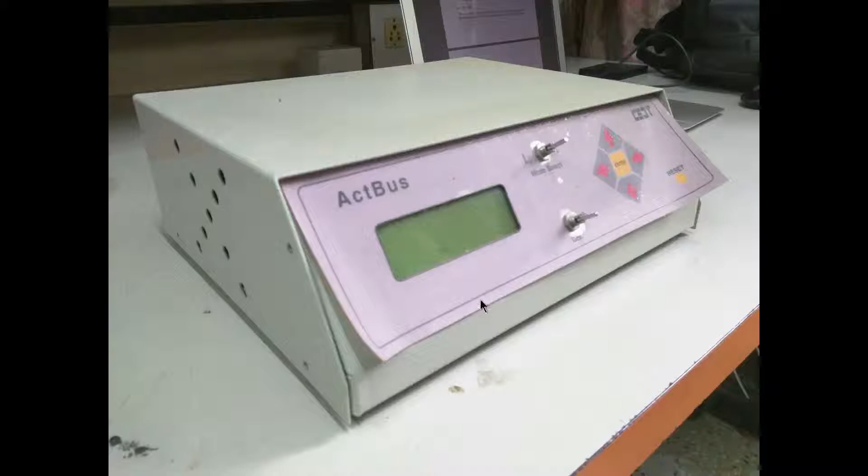Earlier, the only way we could do all this was to try to make it in sheet metal. Please have a look at this model in my hand. This is typically a good starting point. What we used to do was try to make this out of cardboard. Cardboard simulation was the simplest way of making it. I have already shown you, but to make this lecture complete and independent, I will also show you how this was developed.

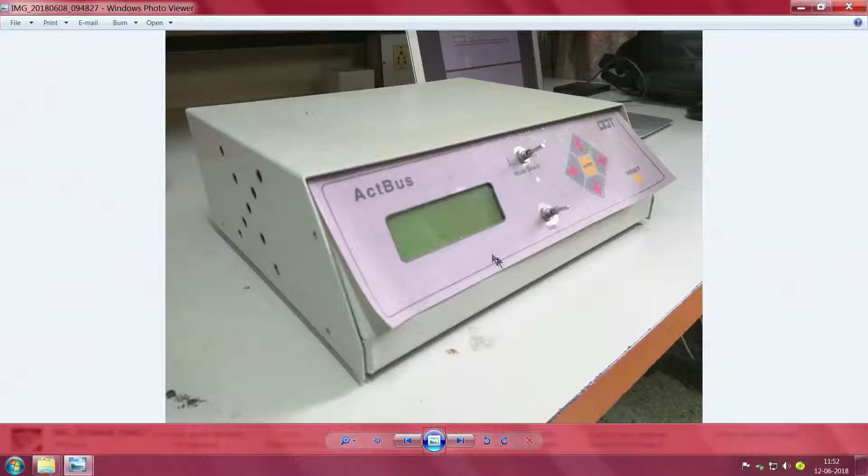This is something generic, so do not be carried away wondering what is the function of this, what is that function. While I can probably talk to you about the function, that is not the topic here. If you were to make items like this, earliest was you try to make it on your own, if you have a workshop, alternatively go around searching for it. Now here comes the important thing about detailing.

On the front we have all this beautifully colored design, you have seen that there are 4 keys, and traditionally what people used to do is make it into a simple matrix-like thing. If you can kindly look at this keyboard which I have here, this computer keyboard, you can see these 4 keys. Because of various considerations, you have no choice but to place them like this, because there is no way of making them into a diamond shape.

If you see this side, however, there is a provision by which this is the home key, and this is up, this is down, and this is towards the left, and this is towards the right key.

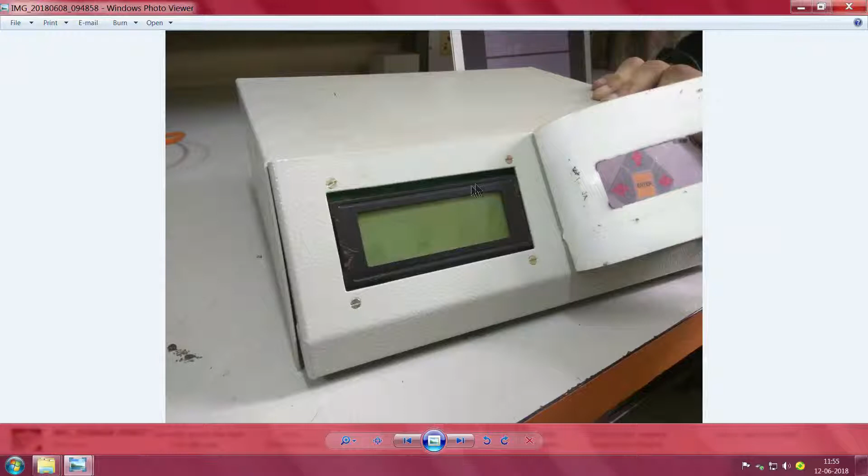Now you see one very sad thing which often people do. You see here, this is a key, I am not sure whether it is a potentiometer or anything, and unfortunately the letters or the designation for it has been printed underneath, very tough for anybody to read. Similarly, if we were to place it here, we still have this problem of how close do we place it. However, for this reset button, there was no issue, they could manage it.

Luckily it is there, you have seen that after everything has been done, somebody by hand has put left and right.

So these sort of surprises can easily be got over if you do the whole thing in simple rapid prototyping using 3D printing. The advantage of this is, something I don't know, they have written some DBL and so on, maybe you can put it there and then you can make these things easier.

Now when you come to the back of the equipment, things have become much more serious. You have seen this - we have a potentiometer, some jacks, and imagine after the wire has been placed here, you just can't read it, even as it is we can't read anything. These surprises can easily be got over if we make it up front. The whole thing could have been printed easily and would be very easy for us to do.

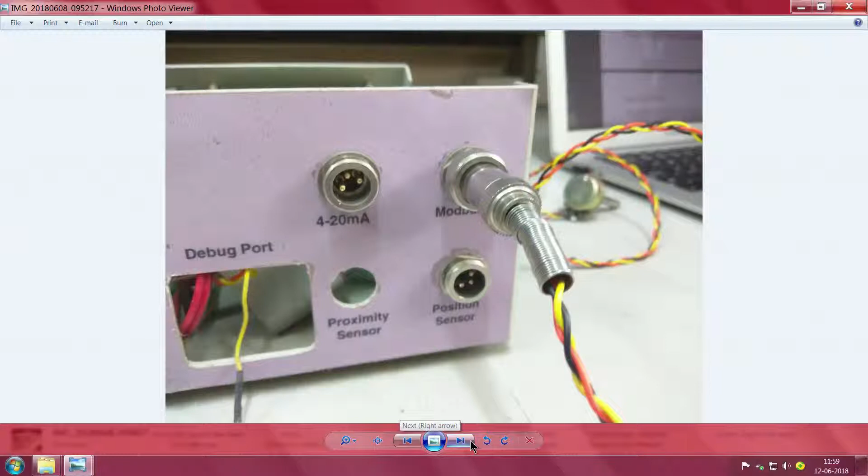See here, what I was talking to you a little while back - the moment you put all this, there is no way of reading anything here. Go further up, it's a complete jungle there. Anyway, my topic is not about this layout, the topic is how to make a nice box for it.

A slightly improved version is that you see here, instead of those connectors, this unit instead has these banana sockets including wraparound. You can open it, put it open. In the case of a professional unit, we have terminations which have screws and which are also protected, and this is in the lab environment. And you see here we have something neatly put there.

Why this has all been done, and why I am insisting for you, is that being in any sort of developmental lab, probably these are all generic. Once you make solid models for this, it is easy for you - just like you go to the workshop and use a standard punch and die to make these openings or standard drill bits, you can easily transfer all these details across all your projects. So first, when you start the project, you probably have to spend a lot of time getting the original component, and then try to create these things.

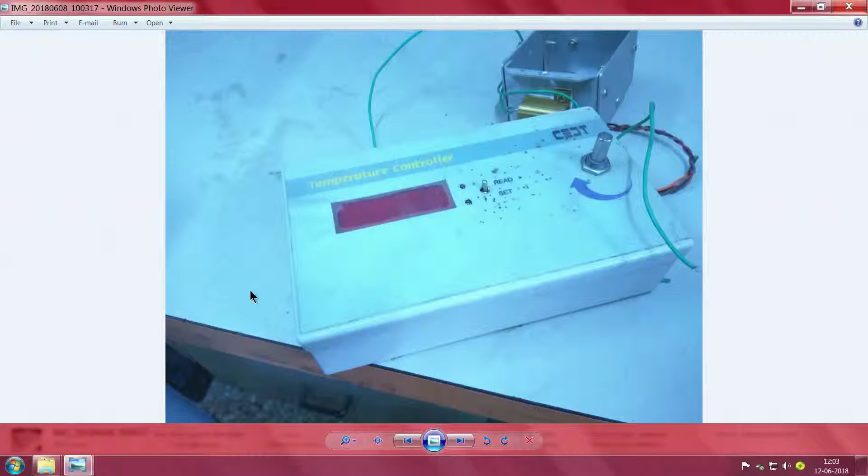It is very much possible for you, if you use our RPT techniques, maybe this display and all this stuff can lie on the long side, so you can stack them. Right now this can't be stacked, this can only be used for one unit. We can stack them. Alternatively, in the case of drives and all that, probably you can stack them like this here, so you can have a matrix of these things for various demonstrations.

So we have come back, I will just quit this. Now try to show you something else. Here we have, I do not know, it is a generic panel which needs to stay at a readable angle. So if you go to the left side here, you see probably this is the profile.

Advantages of working in our scheme is you can now conveniently build all these things. There does seem to be a little error here, is it not? But this is, I am trying to justify, probably intentionally provided. Idea being, you have rubber shoes or rubber feet here, and this will come all the way down. This is almost touching the place.

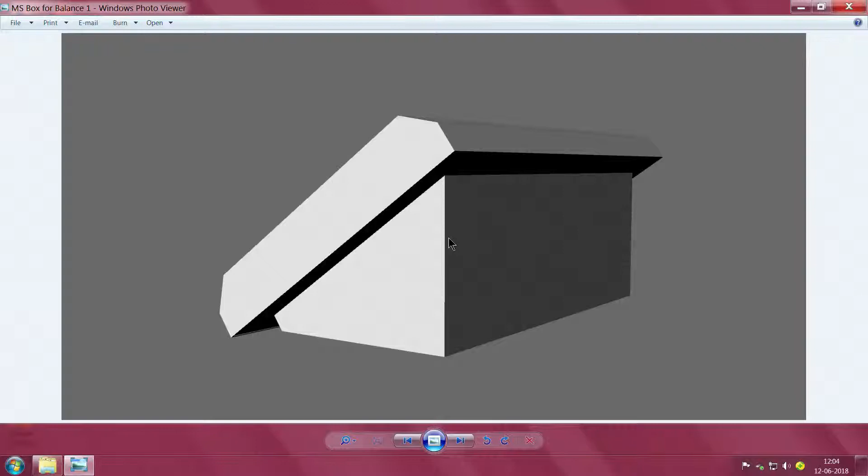So you see here all these profiles, one of the first things you will notice is they are flat. So if you build it in, what I call, a 3D printing, probably if you can split the parts properly. If you see here, this is vertical, this is vertical. So it is possible for me to build this whole bottom cover in a way it builds easily, or alternately I can make it in a flat condition.

And the most important thing is, you have seen this has been shown here like this. In the case of our prototyping, probably we can even just take it straight like this. After we take it straight, think about how to assemble these things. This is where we have a nice advantage of working with these things. See here, so it is very easy for us.

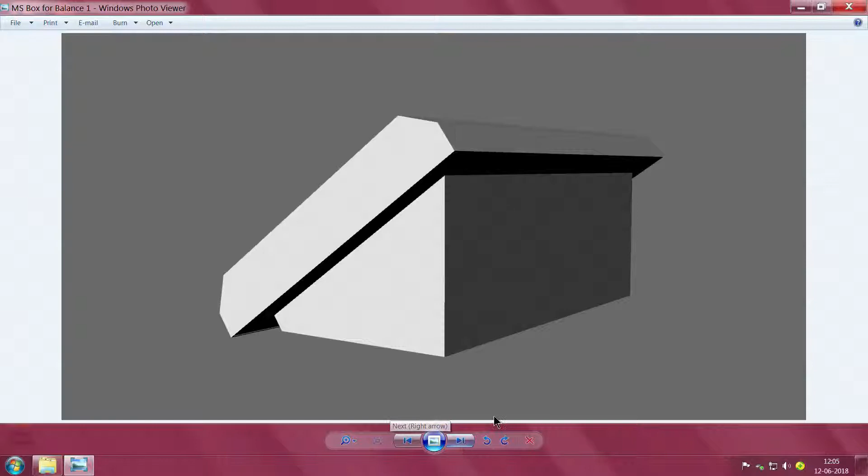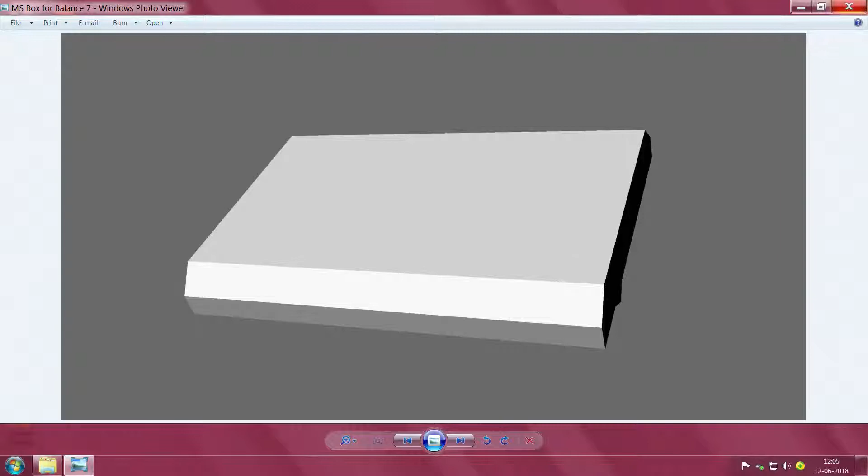So the first thing is, you need to conceptualize your equipment, and if you have all the detailing, it is easy for you to go ahead and do your whole bill of material.

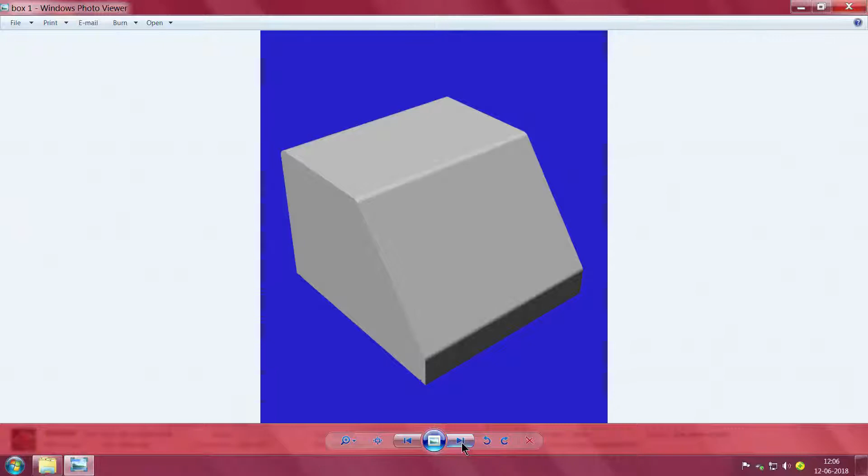Coming back again, this is typically an acrylic module, which is used for, I do not know, generically it can be used for anything, but things are written here, you can read it. And here comes the advantage, saying now this is exactly what the box is trying to show here. Have a look at it.

Maybe it is a time that you can have a look at it. This is eventually the outside thing we would like to have. Can you see here? In the case of traditional sheet metal, we always split the whole thing into two parts like this. This is made as just an exercise so that participants can understand.

In this particular case, this can be used both by sheet metal work, then it can be used directly for 3D printing, or it can be used for just directly laser cutting all these parts, like this, and all can be laser cut. Or if you want to be a little more careful, especially with these bends, maybe we can laser cut the whole thing, and then after that, by appropriately using some bending technique...

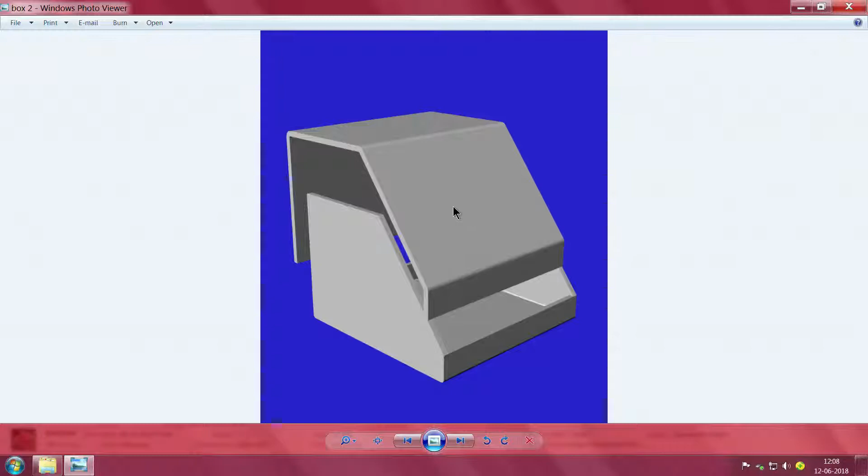In our case probably it is made with either polypropylene or appropriate plastic which bends over easily, or as shown in one of the earlier lectures, polycarbonate sheets of the correct thickness, if you bend over nicely this whole thing can be fabricated. Can you see here, slowly, if you see there is a radius internally. If you make it by sheet metal, easily this can be done, but if you make it in any other way, a little bit of care has to be taken at these corners.

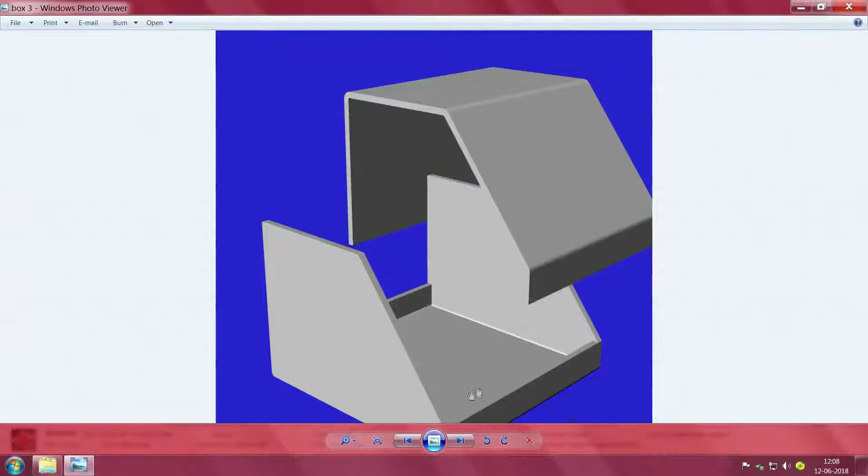For convenience, the corners have been shown continuous here, same thing here, there's no gap or anything. But in real life, because of spring back, or even in the case of plastic, it's impossible to do it. However, if you were to make these things judiciously, cut them using laser, you can always assemble it back with a proper adhesive.

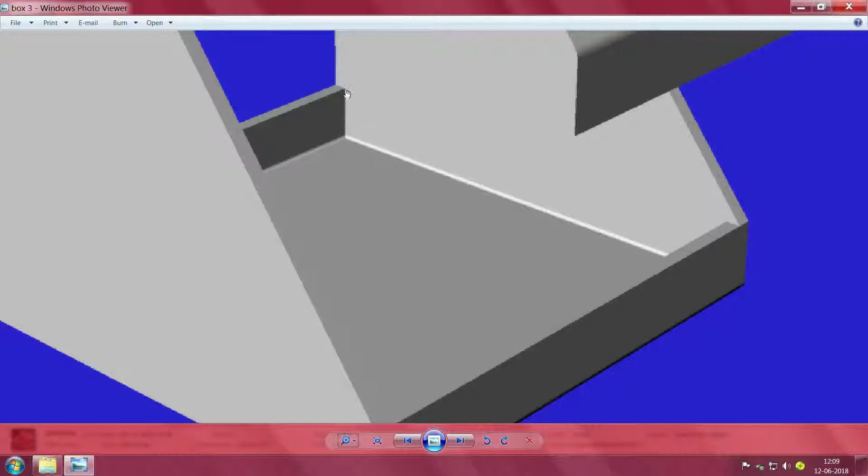In the case of styrene based products, most of them work with chloroform. Alternatively, you can use super glue, cyanoacrylate glue. Except for the toxicity and various things, it's very much possible for you to make these openings and change the color about it.

We can easily print a device which looks a little like this. Now coming back to my display here, you'll notice these two things have intentionally been left kept upside down. Depending on how you do it, if you remember carefully, we have no other choice but to build it like this. If you build it like this, the advantage is it builds neatly here. However, if you attempt to build it like this, we end up with a lot of support material.

So if you have to make it lie on one of its sides, all these planes become vertical, and in one shot we can build it. The advantage being, in case you want openings here, or want to add things here, or have openings elsewhere, everything can easily be built into the original product.

That is where rapid prototyping helps. So the first time, probably you need to make openings, take it out, make it out of cardboard and all that. Eventually multiple prints you can take easily, using the same file that you have created.

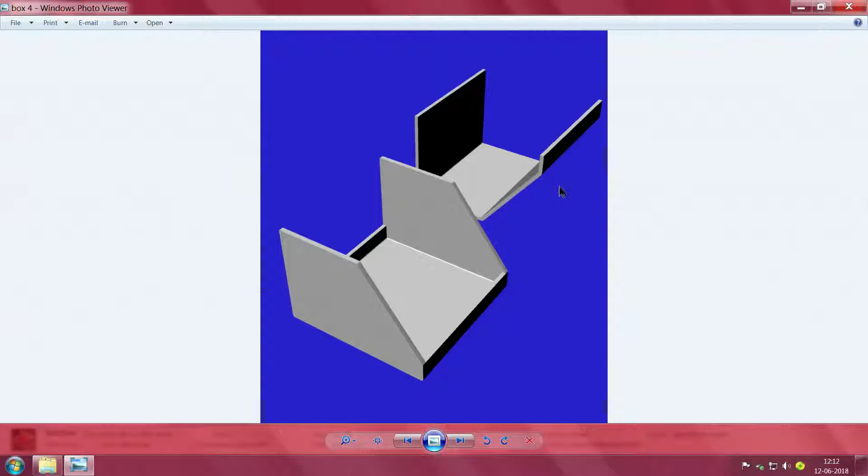In case you have created a DXF, IGS, DWG, or so many of these Dassault, Autodesk, or Siemens format drawings, they will be accepted by most fabricators. And in fact, if you send out the file along with your check in the mail, please find enclosed check, most likely within 1 or 2 days you can have these parts delivered.

Just for clarification, I was showing how these things work. That thing was intentionally built with a thickness, here we have disregarded the thickness when first trying to make these things. So this is more a concept model, similar to the one I showed you, which has thicknesses. Here this is a concept model; you can try it in a flat sheet or cardboard. After you're happy, if you add the thicknesses, the full model can be shown. This is without thickness, this is with thickness, but without the corresponding radii and all those things.

So we shall come to the important point that this 3D printing, contrary to popular expectations, it's not just that it will print. You need to understand a little, but fortunately hackers like you and me are out there available, and maybe you can download something and modify it, and if it's open source you can play around conveniently with it. Now same thing, you see here, this has been cut into small segments.

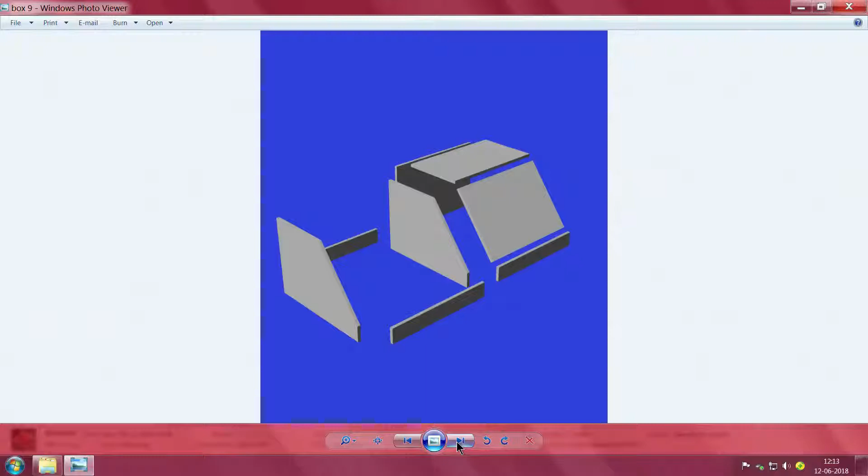Now after cutting it, several options are there. I told you one of them is you can probably cut it in cardboard and try it yourself. That was the development model which you have made, or the same thing you can use for laser cutting. In the case of laser cutting, depending on the thing, you can do multiple models here.

Now just as a thing, let us say I have 4 openings for the thing here, and for connectors I can have openings similarly on the side. And if you see, this is the inclined front surface which matches here. So here I can have all the openings meant for various controls, displays, any other units here directly.

And as I was telling you earlier, you can probably use it, you can save a lot of material if you print it flat. Since here there are no openings and there's a small thing, making it, building it in this condition is desirable, because no further processing is required.

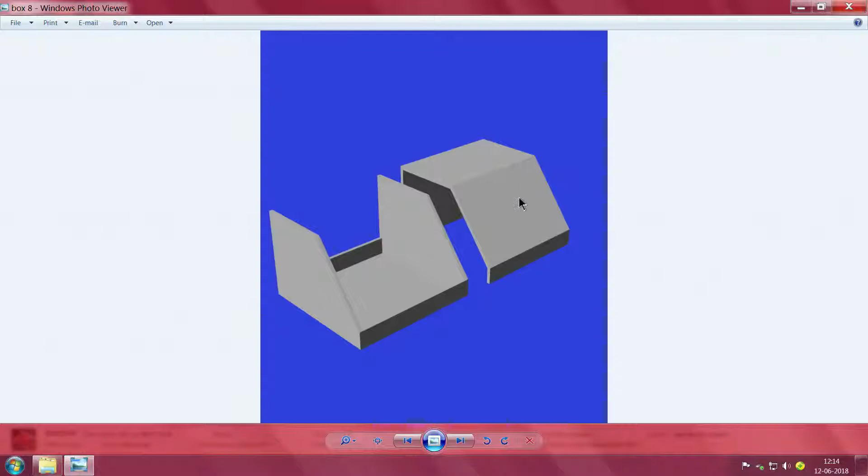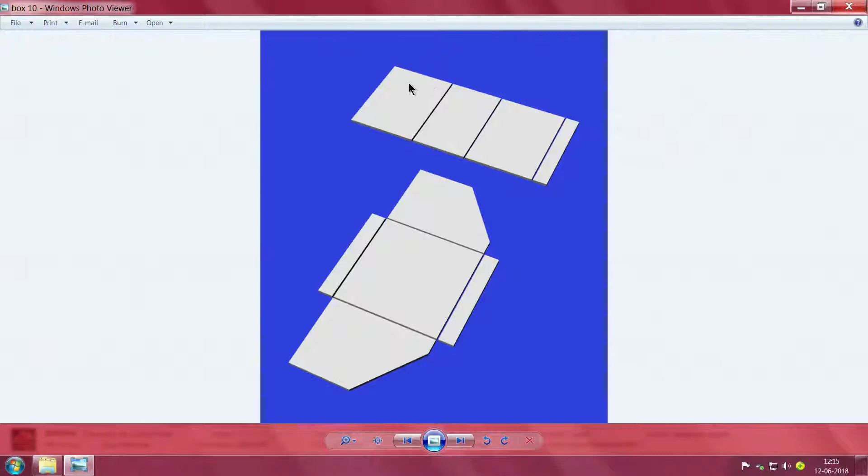However, when it comes to this inclined surface, we are likely to end up with a lot of support material lost, and whichever way you orient it, you may end up with it. But in this case I told you, you can put it on one of these edges, but even then this material inside requires a little post processing. After printing, you have to knock it out and then sand it a little, and anyway this requires all the post processing.

So I will come to another convenient way of building full-fledged sealed boxes. If you see here, this is actually a model that has been created some time back. Looks fine, absolutely no problem, isn't it, except that to save material and have all these things, somebody has worked a lot of detail.

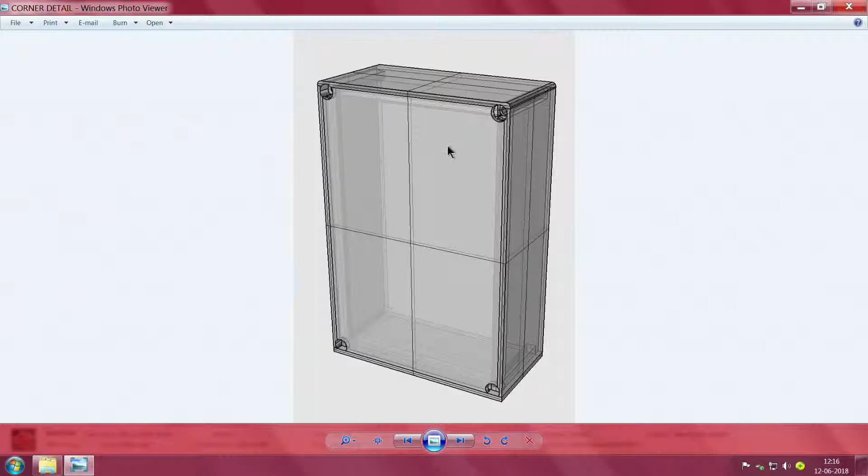This front stuff has been made with transparent material. Right now it is very much possible to print transparent material, and if you do not want the contents to be visible, you can always put a decal or a sticker on top of it. These proportions for an initial thing you can get from the internet from various suppliers. And the magic is, sadly, like most things, you will never have a perfect fit or anything.

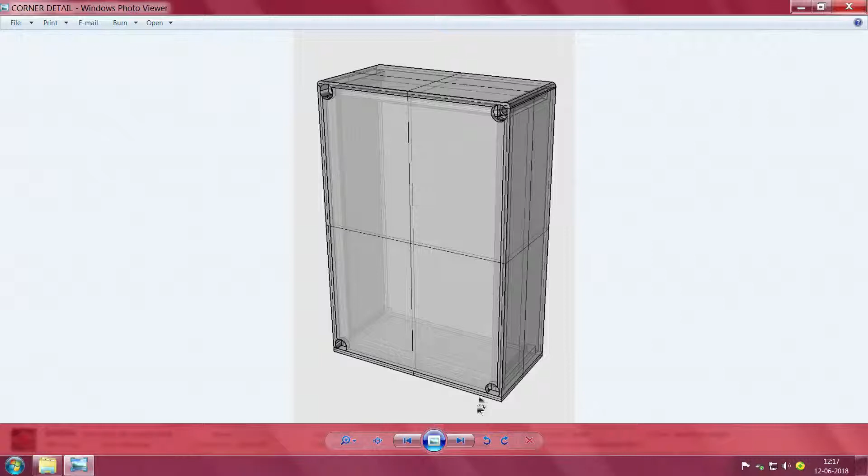There is no one size which fits all, whether it is shoes or clothes or various other things. So you may end up with an enclosure which is not deep enough or too deep, not shallow enough for you, and all the other dimensions, you will end up with something which is tighter or something with unnecessarily extra area. Those times, if you have to ask the manufacturer, that is going to be a big nuisance. So what has been done here is, let me go back a little and see.

Say this is the final box seen here, and you will notice that there is no split line saying where do you close it. And in the case of actual injection molding, probably all these radii are important, and further you cannot afford to have sudden change in cross sections.

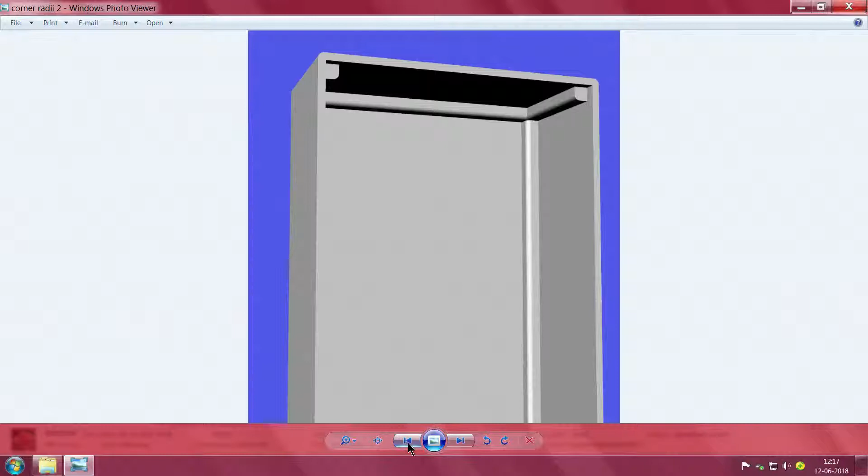But you need this corner strengthening. When you attempt 3D printing, it is relatively easy for us. In fact, if you make these like this and then print them with this base down and print it up like that, these things come out very well.

Now comes the other thing, if I told you, can we add a threaded insert? Depending on how serious it is, if you can have a through opening, it is very much possible to put a threaded insert. One side you can put there, one side you can put here, and enough clamping force can be given such that the cover can sit properly, and the cover itself can be made in opaque material or it can be made transparent.

In this specific case, if you make too many openings, chances are things will leak. Instead, you can make it with a transparent cover, because it looks like various clear materials will be there. I think in the third or fourth lecture I gave you an idea of what materials can be used, and you can print it with a clear cover.

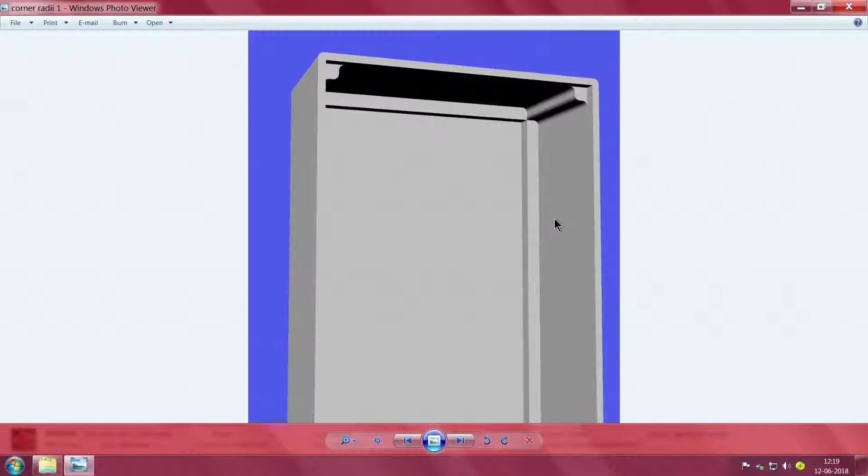You can always put a fascia. If you put it inside, it looks clean. If you put it outside, you have some advantages, and expose only the same areas as you have done in that sheet metal exercise which I have shown you. So you see here now, at the back we have this, or in the front.

Let me go forward for something, how to make use of the same thing in the case of, let us say, you need to make a small cup. This cup is required for you to hold maybe some torch cells or maybe a sensor or anything. So if the manufacturer has not given you a recommended enclosure, creating such things and printing them is extremely easy, you understand.

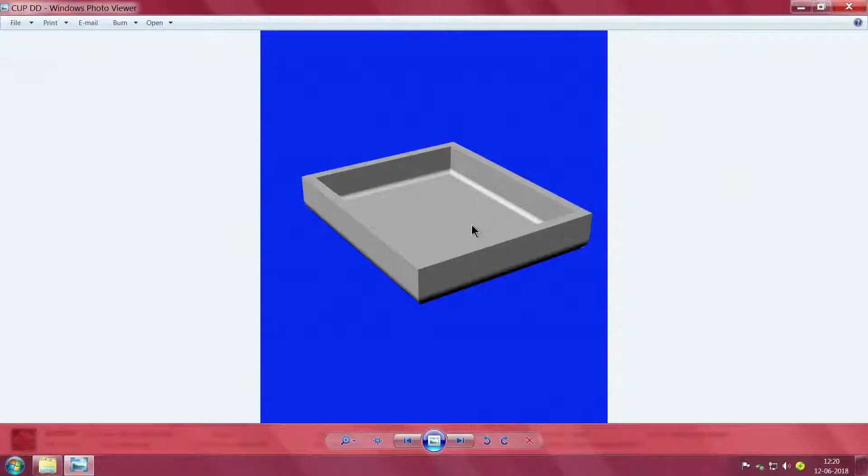So you must make a model of the contents. It could be a simple printed wiring board which has all the various displays and sensors, and then after that, printing this is extremely easy, and up to maybe a few hundred models, easiest is to carry it like this.

Small difference here, if it involves strength, we end up having to give all these corner reliefs because bending is involved. So since the advent of printing, all the small things earlier which we used to unnecessarily concentrate on how to make these things, which is probably just of the early industrialization, everything was made out of tin cans.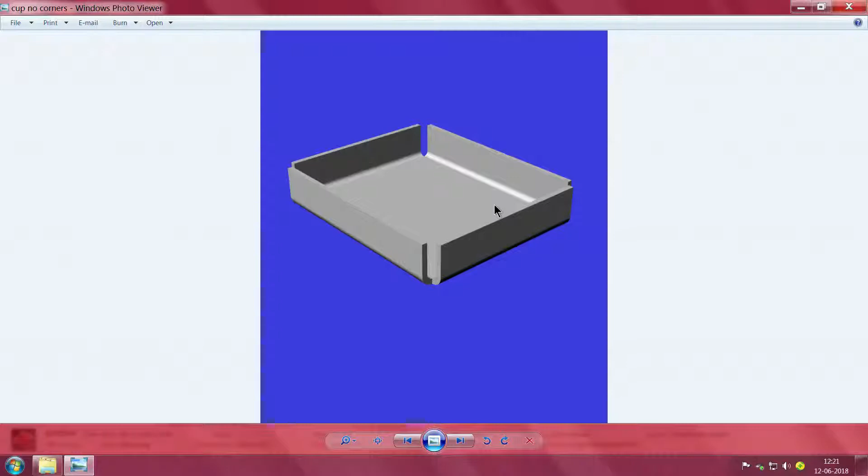I have shown you a box of mints, that blue colored box earlier. It is made with a 0.4 millimeter galvanized mild steel sheet, formed like this, including a lip. Now all this can very quickly, without too much trouble, either be made like this or you can happily print the object directly here, which I think is really something.

So now you have seen this with the reinforced corners. Now, what has been done is, let's say you need to make it using sheets that are cut directly in a laser cutter. In the case of laser cutter, unfortunately, unlike 3D printing, you need to reinforce the corner separately with these items.

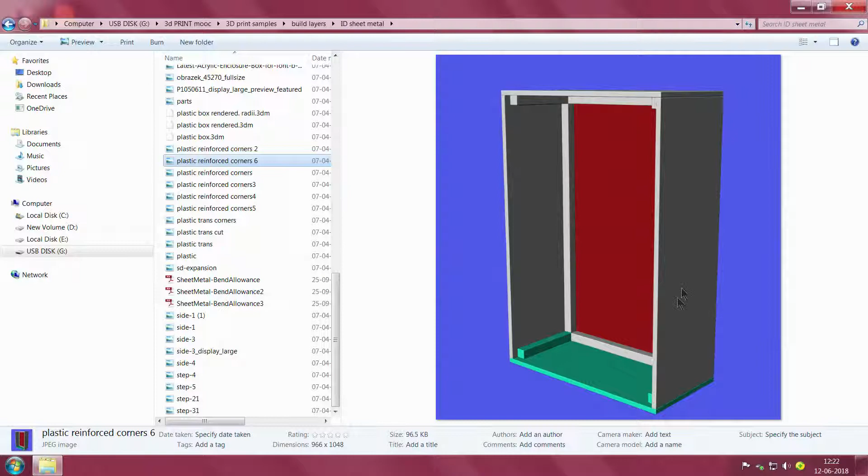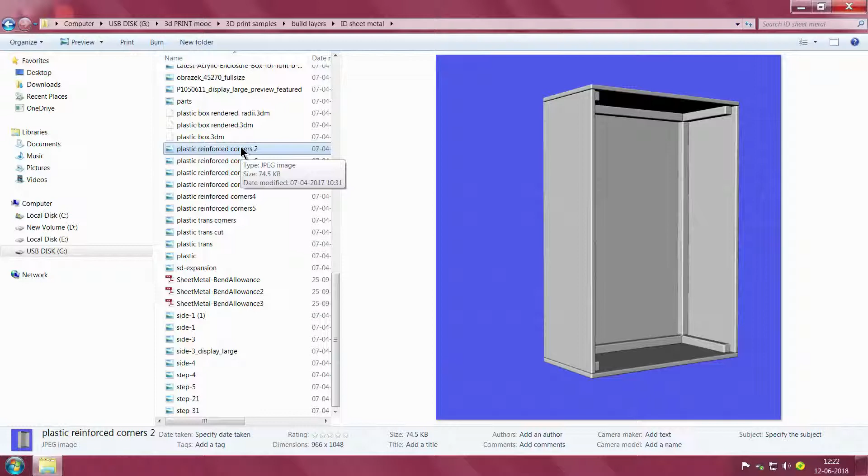So this has been done just to show, maybe start here. You see here, this is our original drawing, 120 by 80 by, I think this must have been around 35 or 40 millimeters, and the small things, we can attach them. See here, if you go into the corners, a little bit of this overlap is there.

Why is this overlap, and why the detailing is being stressed upon, is because when you make it out of pieces, we still have this problem of how to compensate for all these physical thicknesses that are required.

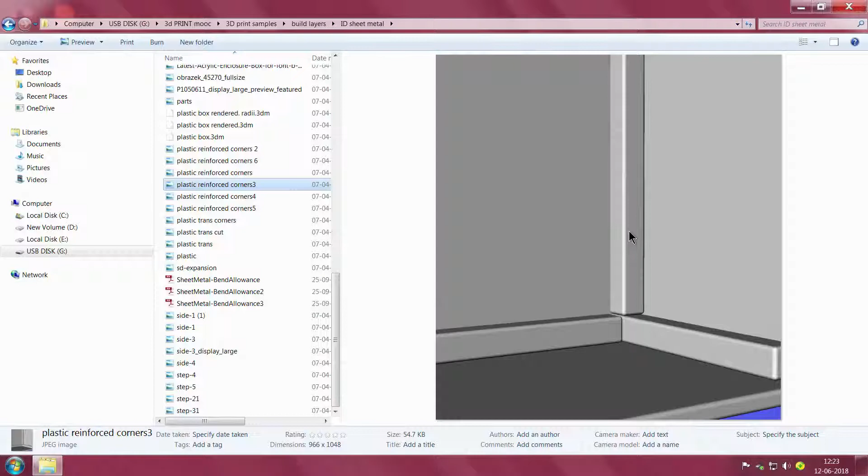So this can be a strong, probably an extruded item, typically it could be a glass filled nylon rod, or so many other materials are available which can easily be attached to the thinner, flatter material. So the thing is, to what size you need to turn them and all, the details have to be worked out.

Now see, something which has happened, this is only more for these corners. When we come to these corners, only for convenience I have added this radius. You need to find out what thickness sits where, and all this compensation has to be given.

This reality of these physical things does not go away, and earlier workshop people, rather the machine shop people, were very much familiar with it. Same thing it is with whoever makes injection molding, whoever makes the molds and all that - without telling you, they try all these exercises.

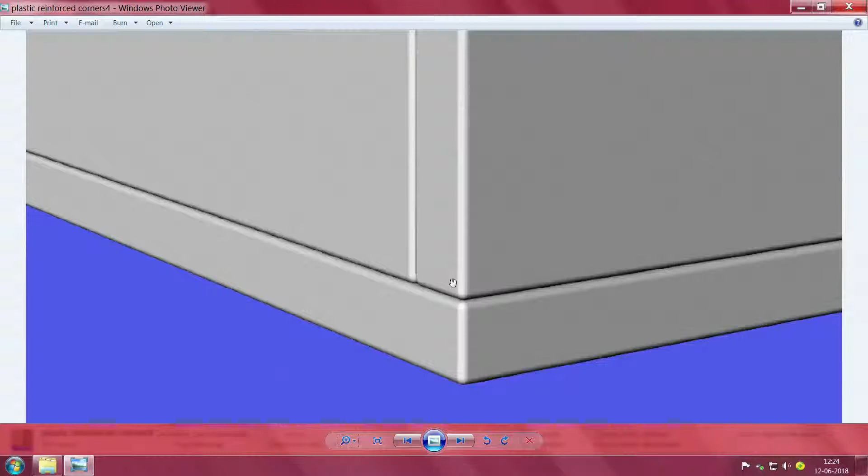So if you are in that area, now you know that 3D printing will easily help you in making all these things. Now, see here, a cover is being placed, one cover is at the bottom, and so we have these beautiful things which are very much possible.

Now I thought I will just show you here. This is the starting point. While in the starting point everything looks fine, we have a neat, cute 40, 80 and all that, but thickness is not shown here. So as you develop these things, you are expected to have all these details worked out.

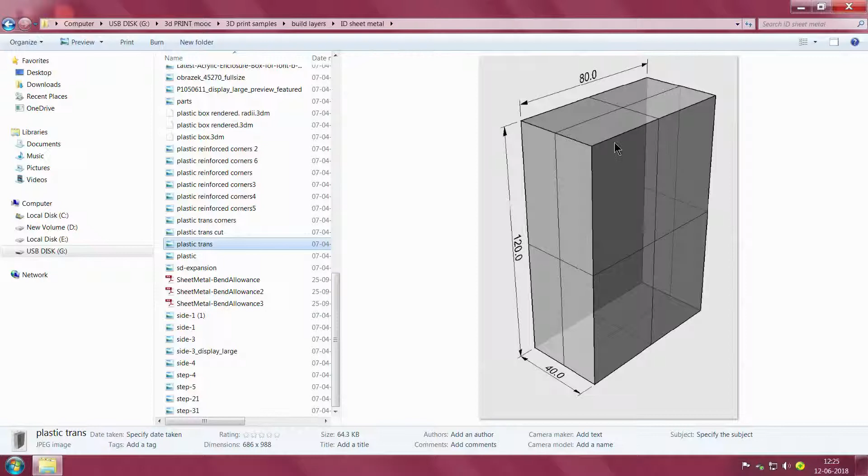This is the same thing, how it looks outside. If you were to take a little closer look at these things, there are a lot of small details, including a key-like thing which makes these things hold together.

These are all maybe things you can directly, you know, try first from the market, and maybe part of this file itself may not be used, but all these drawings and layouts, you can easily continue to get from what you've seen, just details.

So you see here there is a serial port, and why I am insisting that you see all this is, it is not enough if we just make an opening for this, which several of our users may not have seen before, this serial port. You will notice that it has a hood assembly on the outside, and you need access such that the hood comes and sits here comfortably.

Hence these openings and all have been worked out, and once you keep it in place and get your thing ready in a semi-professional setup, most likely one way is to try to ask those manufacturers whether they will make it for you.

If you are to ask me, if you are an electronics person and not a simple hacker, it will be much easier for you. Ask the manufacturer saying, I have a new thing by which, you know, probably I do not need an Ethernet input, and I have probably something already built inside. And in the case of USB right now, from the standard thing, USB C is getting in place. The advantage of C is that, like the lightning cable, you can insert it in any direction you like, and they have also increased the speeds.

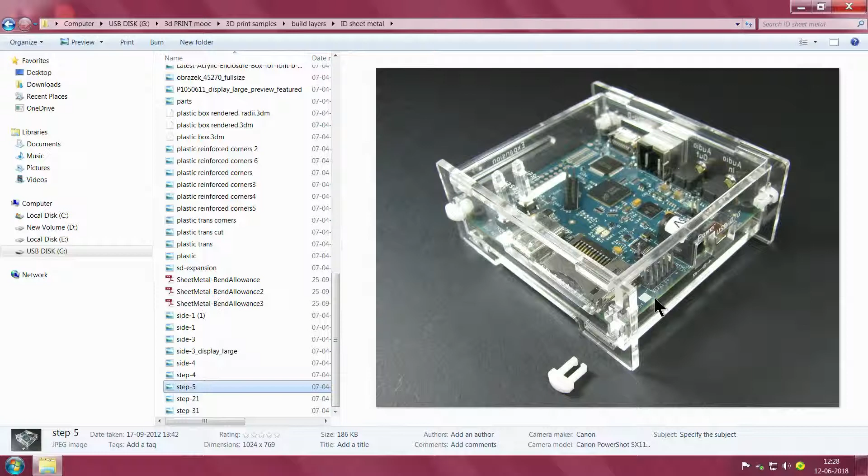So, you see here, that is the locking key. After putting it in place, they have got a plus-like thing and all that. These details you can now easily see, and if it is a generic case, you need to make all these things.

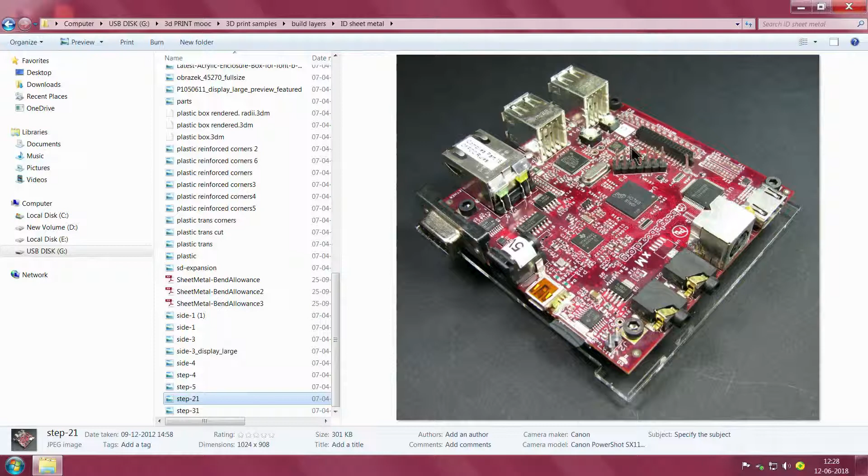I think we have come to the end. You probably start with the base, and then you have all these, I do not know whether they say audio come in something, in and out, could be an audio jack, and then this is very clear 5 volt input. The product you are going to make may not have a 5 volt input, it may be stacked inside. If there is a place here, maybe you can put a stack and have a 3.7 volt lithium ion cell, and you may need a different charging port, not this one.

So all those things you can easily build inside. I had just downloaded it, I thought you should see how these things work. The other model I couldn't locate somehow, thanks to the thing.

This is all cut as a trial piece even before you fire a job. It is very easy for you to make these things, they are not impossible. You see here how they have been made, and finally it just works. I did not do it, one of my colleagues is an expert in these things, and finally we have it here.

Now when you want to convert it into sheet metal, these corners end up into these corners. The same thing happens when you have it with 3D printing also. You cannot ignore these real thicknesses and all that.

Now you saw the box which I showed you. When it actually comes often in the kit form, it comes like this. It looks a little like wood, but then when you do the laser cutting, it comes with a backing sheet on both sides. So the trimming is done with the backing sheet, and then you have all this hardware which is kept here.

So you need to keep it in place, usually instructions are available, and the magic is you can make it yourself. If you are making a particular thing, you may not need all that. For example, on the go, you may not need an SD card socket, and power in this case is 5 volts, maybe you can have other requirements also, and not often are serial buses used these days.

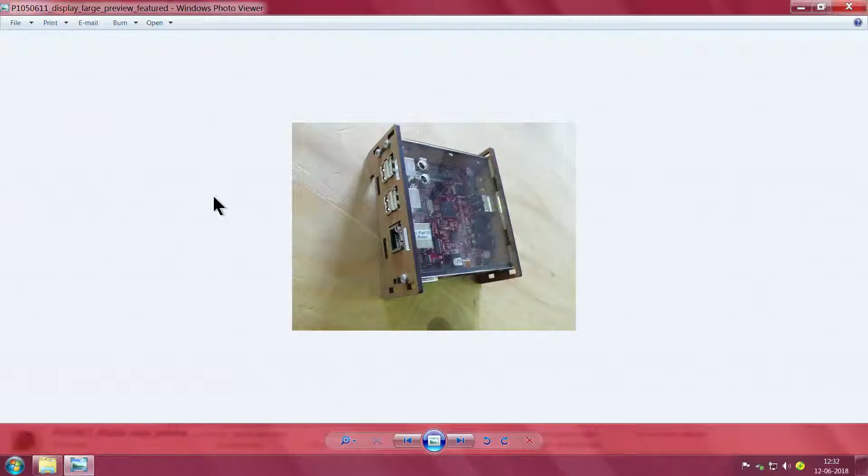BeagleBone Black, see this here, it has been stacked. Same thing, stacked, and actually there are screws here. So these fasteners hold it in place.

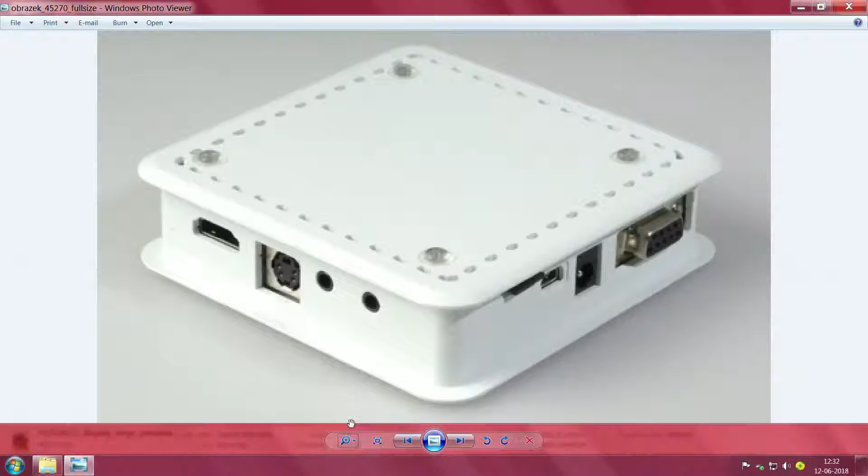Something else again. So why not make something which sits neat here. If you remember, it is taken from that, there is some, maybe this is the USB jack, and maybe this is their power supply serial port, and just by making the top and bottom overhang like this, suddenly that boxy appearance has been removed.

Instead of one getting into the other, you see here most likely this top portion is one and the bottom portion is one. If you examine it carefully, printing these two is very easy, and no support material is needed because it has been split neatly. So both pieces can be printed flat. After printing it flat, just put them together and nicely we have a beautiful enclosure for all practical purposes.

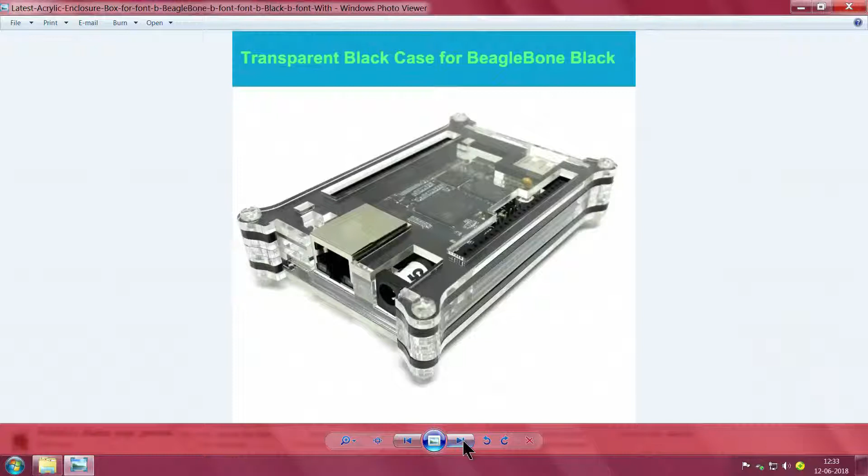And then this, of course, I have already shown you. I will now go out. So you see here, this I have already shown you.

I will continue tomorrow with something. I have a video taken in the workshop about a machine shop operation going on, and even with this machining and all that, we ended up with some reality problems. So if we were to actually make a 3D model and then print it, it would have been easier and would have saved time by making it into a half scale model. Overall the volume will be, I'm sorry, 1/8 of the volume, and we would have had a small item.

We will see how things fit together later on, take it to the machine shop and have the fabrication done. So, thank you.